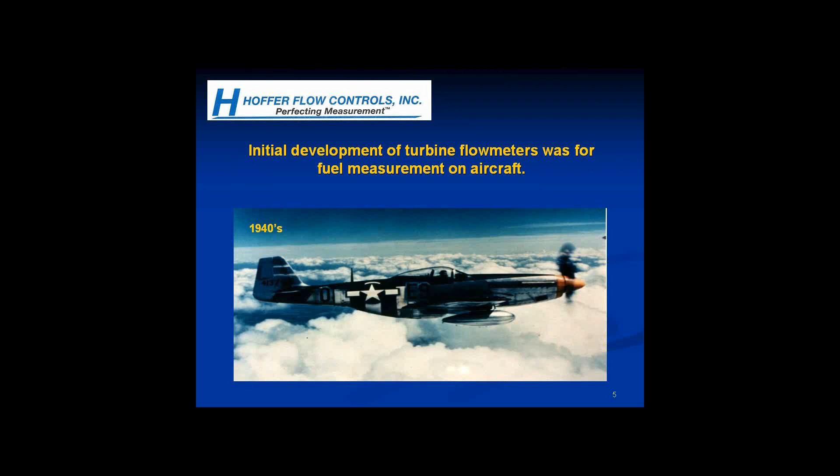The company of Hoffer has been around for a number of years, and some of the applications we've developed over the years continue to be flight-qualified liquid turbine flow meters for, as you see here, the stealth bomber.

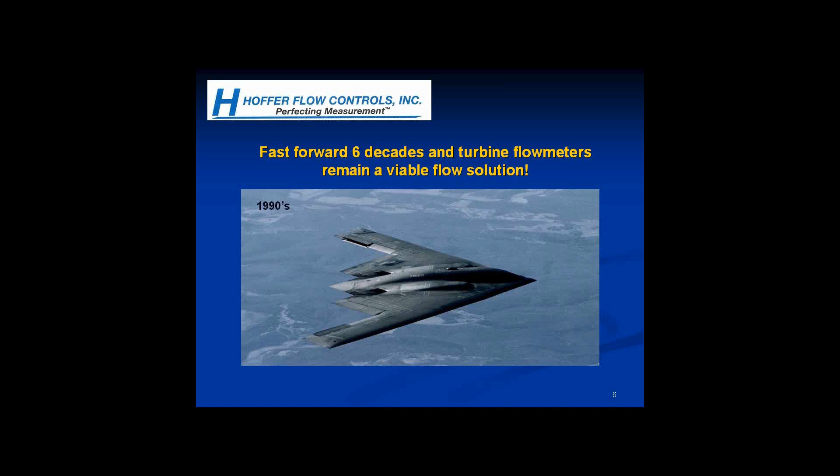Hoffer Flow Controls is a privately held company. We are located in North Carolina along the Eastern Shore, and we have a reputation in the industry for providing very high quality, high performance turbine flow meters.

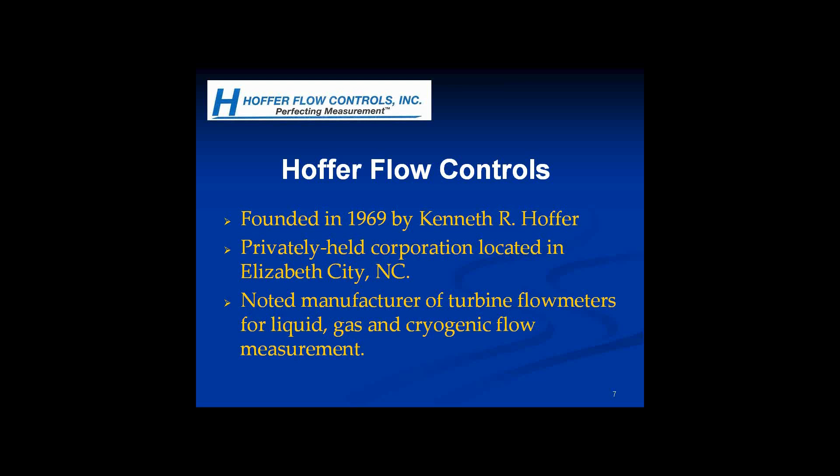Liquid cryogenics: primarily our meters can be found on bulk delivery trucks of liquid oxygen, argon, nitrogen, and liquid CO2. Our meter is essentially the cash register on those cryogenic bulk delivery trucks. Other markets include pharmaceutical and biotech. We do quite a lot in military, water and wastewater, aerospace, automotive manufacturing.

Our meters, interestingly enough, are mounted on a number of NASCAR automobiles and also on drag cars for monitoring the fuel usage and the fuel consumption on those race cars. And for the power industry, our meters are typically used to control the NOx emissions, or on the fuel measurement side in power generation.

Our company has a history for being able to design and build custom flow meters in a relatively short period of time. Some examples of our custom design meters include high pressure units. We've designed and supplied high pressure turbine meters that are rated up to 60,000 PSIG. And we've worked with all types of exotic alloys and

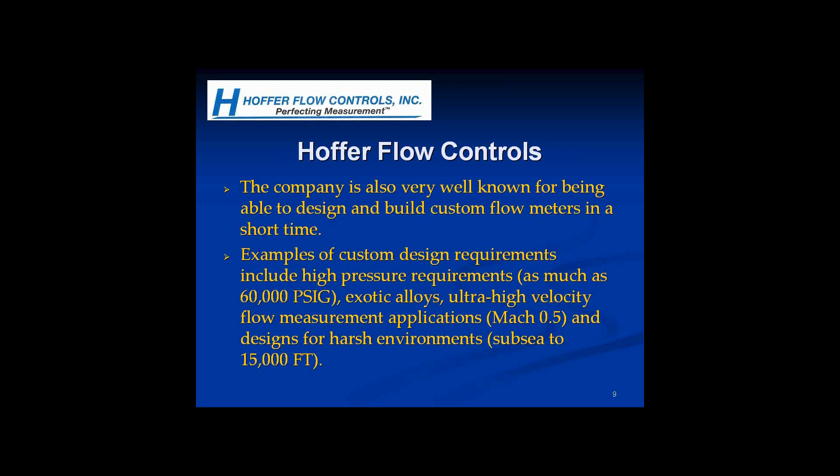A basic review of the technology itself: a turbine meter is measuring velocity of the moving fluid, and they're typically used in clean, low to mid viscosity applications. We typically cap our meters at about 100 centistokes. Any applications that are more viscous than that tend to become extremely nonlinear and non-repeatable.

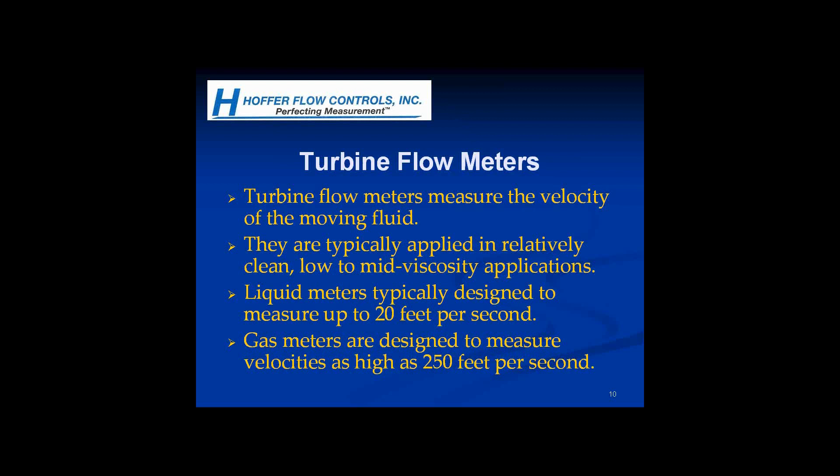We have a through shaft that supports the flow meter internals. You'll see a lock nut at the end of that through shaft on the inlet and then on the outlet side of the meter. We have a rotor assembly mounted directly under a pickup coil. So as the fluid or gas moves through the turbine flow meter, the rotor assembly rotates and the pickup coil produces pulses. You can relate the frequency of the pulses to flow rate, and you can relate the number of pulses to flow total.

With turbine meters, you're typically talking about some basic definitions in performance. Linearity is a measure of the accuracy of the device relative to the K-factor. So it's the percentage of deviation from the average K-factor. The K-factor is the number of pulses that the turbine flow meter produces per engineering unit. So, for example, a 1.5-inch turbine flow meter typically produces 230 pulses per gallon.

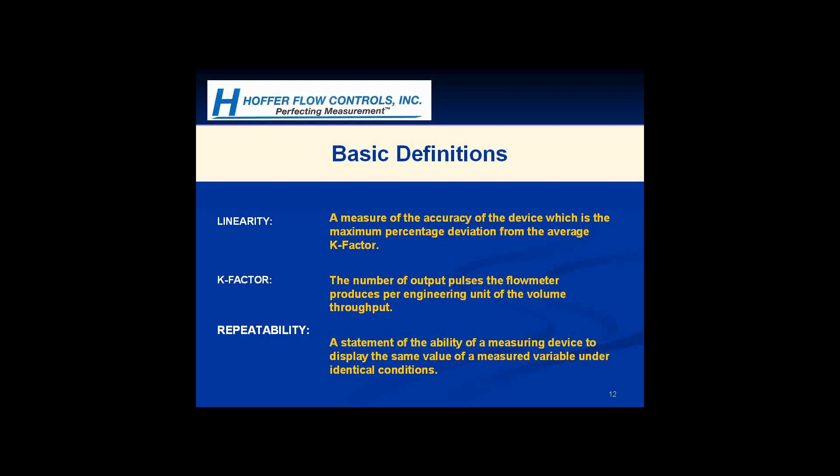So typically this would represent a K-factor over a 15-to-1 to a 20-to-1 turndown ratio between maximum flow and minimum flow. And some other variables and performance characteristics that we're looking at relative to flow rate: your pressure drop through the flow meter increases as your flow rate increases, your frequency output coming off of the pickup coil increases relative to flow rate, and the amplitude of your signal increases with flow rate as well.

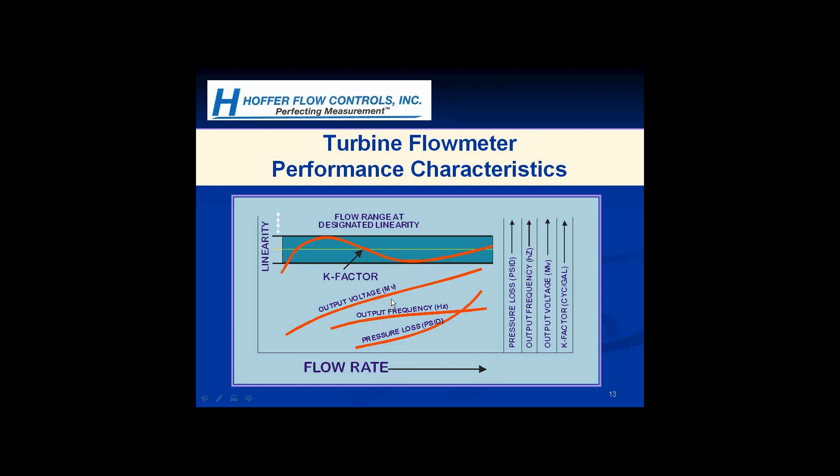Why use turbine meters when there are so many other choices, and how does a user go about selecting the best flow meter for his or her particular application?

Well, one of the things that Hoffer really specializes in, and our forte, is in the supply of application-specific flow meters for a particular application. We do not typically approach a flow application with a standard product line and try to make the standard product fit within the scope of that application. We take the specifics of the application, and then we try to design and supply a flow meter pertinent and appropriate for that particular application.

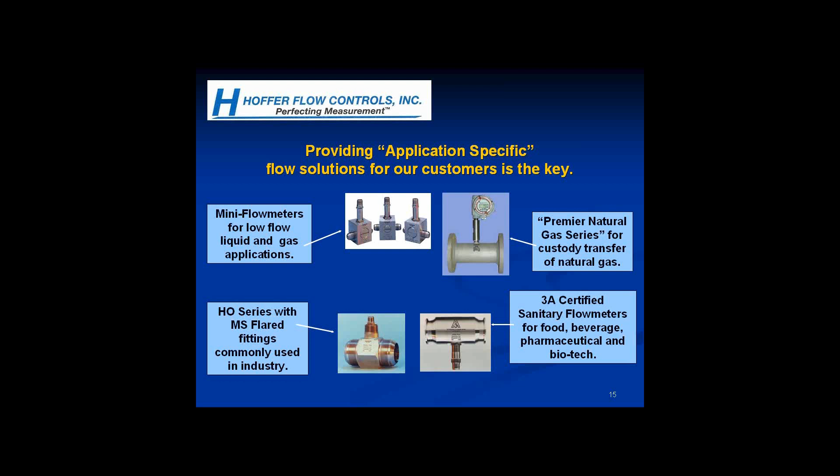Let's talk specifically about some of the advantages of turbine meters over some of the other technologies that are available to users today. And one area where turbine meters are considered to be perhaps a better choice than other technologies is in terms of performance. They're extremely accurate, and they're commonly used because of this accuracy and this linearity. They're typically used for custody transfer on pipelines and custody transfer as other goods and liquids pass from one supplier to a customer. So oftentimes turbine flow meter systems are used basically as the cash register in lots of custody transfer applications. So performance is an advantage.

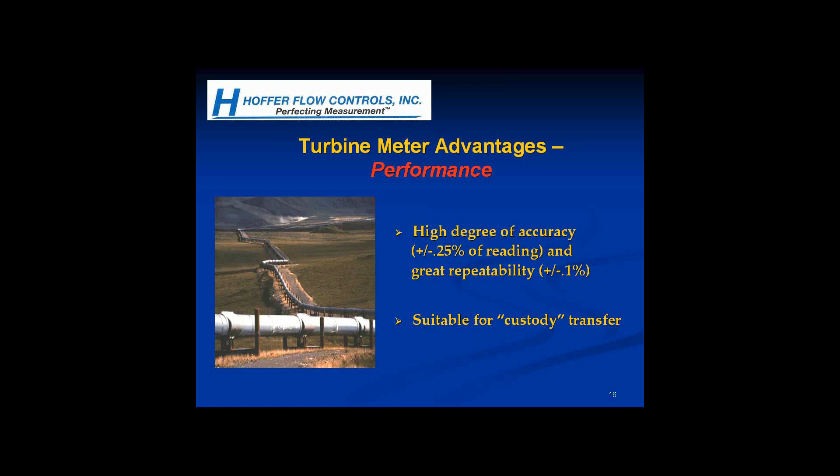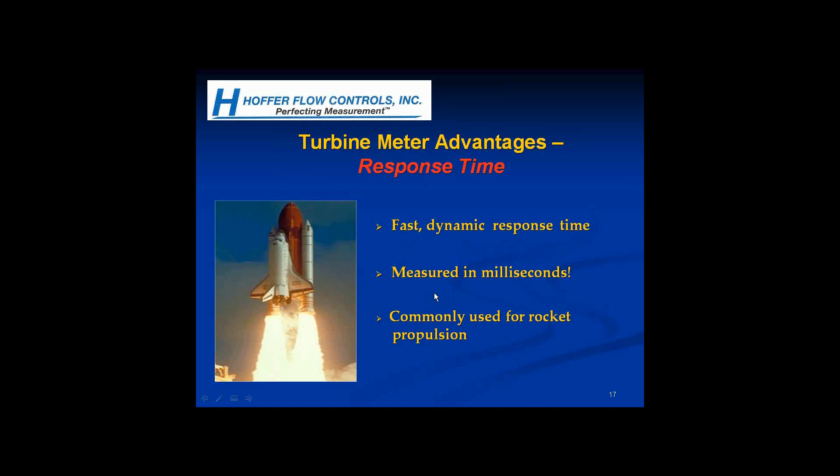Another area where turbine meters really shine is they respond very quickly to changes in flow conditions. So the response time is very important on turbine meters. And the reason they respond so dynamically is in the case of the Hoffer turbine, we precision machine all of our rotors. They're all machined, they're not cast. So they're relatively light, and because of that fact, they respond very dynamically to changes in flow rates. Those changes can be measured in milliseconds, and turbine meters are commonly used by NASA for rocket propulsion.

Another advantage of turbine meters as a class of measurement devices, they can be designed to tolerate and work reliably in applications where there's a lot of shock, vibration, and temperature extremes. And an example of that would be in cryogenics again. As I mentioned earlier, our company supplies turbine flow meters and totalizers to the cryogenic market for use on their bulk delivery trucks. When we pioneered the use of turbine meters back in the 1970s, prior to that time, most of the cryogenic companies were billing customers as a function of the weigh scale. They'd load product onto the truck, make a delivery, go to a scale, and figure out the difference in weight and bill based on that function.

Today, actually all cryogenic trucks in North America and most throughout the world are outfitted with flow measurement systems, and in many, many cases, those are Hoffer flow measurement systems. They are designed to tolerate the over-the-road shock and vibration conditions that will obviously be seen by the truck as it makes its delivery in all kinds of weather conditions, from very warm temperatures to very cold temperatures. The cryogenic liquids themselves are very, very cold liquids, so our meters had to be designed and are designed to tolerate working temperatures as low as minus 450 degrees Fahrenheit. And as I mentioned earlier, our systems are basically the cash register on many of the bulk delivery trucks.

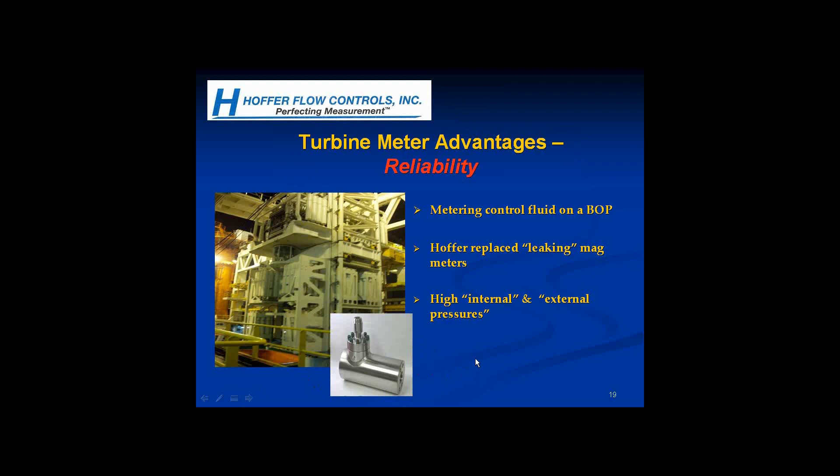But reliability would be an advantage of a turbine meter, perhaps over another type of meter technology. The meters are designed and can be designed and supplied to be extremely robust. Hoffer has supplied turbine flow meters to the U.S. Navy for every class of U.S. Navy vessel that is in our fleet.

We have flow meters that are used to supply the fuel to the engines, and we have flow systems that are on ships for missile cooling applications. We've supplied flow meters for the reverse osmosis water purification plants on ships. So they can be built, obviously, for applications that are, again, in a harsh environment and that are subject to shock and vibration.

And what we did to make the flow meters more robust and capable of meeting military standards for high shock and high vibration is we altered the design on the internals of the flow meter. You may recall that cutaway shot earlier where I showed two bearings and a through shaft and the rotor assembly. Well, the Navy design meter is similar, but it is different in that it is a design that is more robust, and it is also a design that has been tested to meet military standards for shock and vibration.

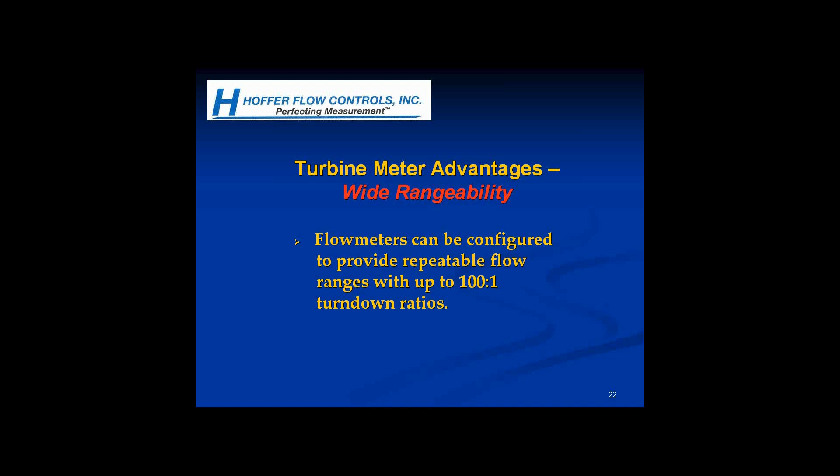Another advantage of turbine meters is wide rangeability between your minimum and your maximum flow rates. We are capable of obtaining flow turn-down ratios of up to 100 to 1 for our flow meters, and that's very impressive because that's a repeatable flow range. And I'll show you an example of that.

A modulated carrier pickup coil is offered, and the benefit of this particular coil is it eliminates the magnetic drag characteristic that you see at the low end of the flow curve. Remember when we looked at that slide earlier and we saw how the linearity dropped off at the lower flow rates? There are a couple of reasons the K factor and the linearity drop at the low end of the flow scale, but one of the reasons is the drag characteristic from the mag pickup. So if you eliminate that drag characteristic by going with a modulated carrier pickup coil, you'll see something very interesting.

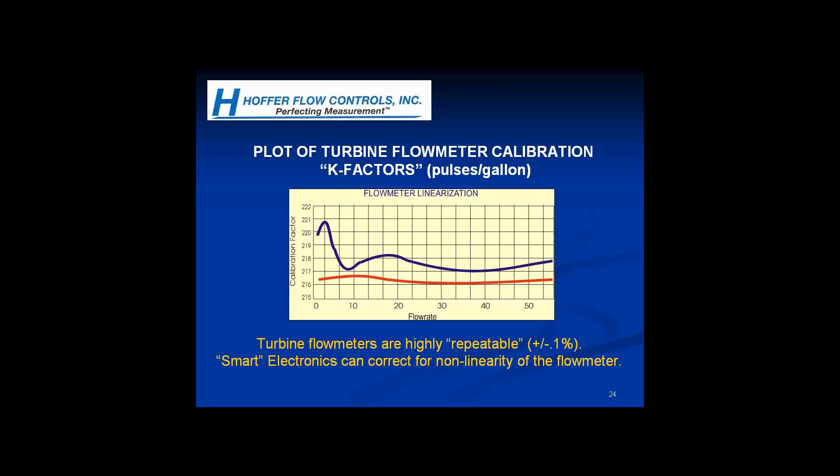Another advantage of turbine meters: they're typically spec'd out in terms of linearity as a percentage of reading, versus other types of flow measurement devices that are spec'd out as a percentage of full scale. As an example, a meter at a flow rate of 100 gallons per minute that's plus or minus 0.5% translates to 0.5 gallons. That's accurate at 100 GPM, but if you're operating over a 10-to-1 ratio and down around 10 gallons per minute, that same half gallon represents 5% of your measurement uncertainty. So there's a big difference between devices when you start talking about specmanship, full scale versus percent of reading.

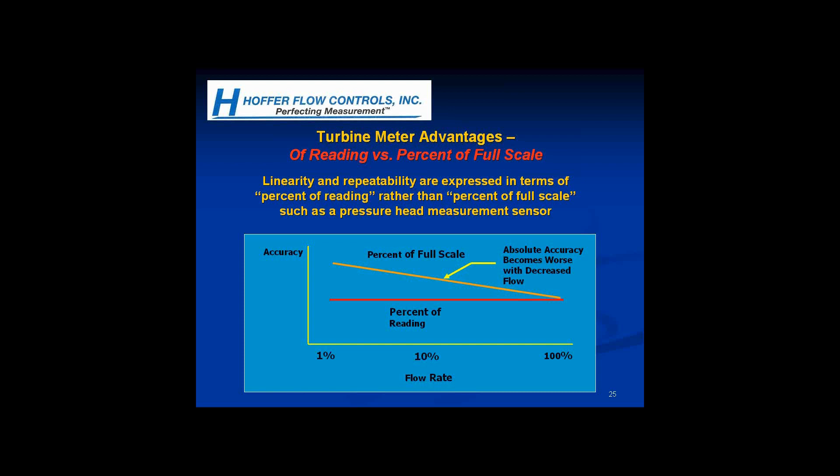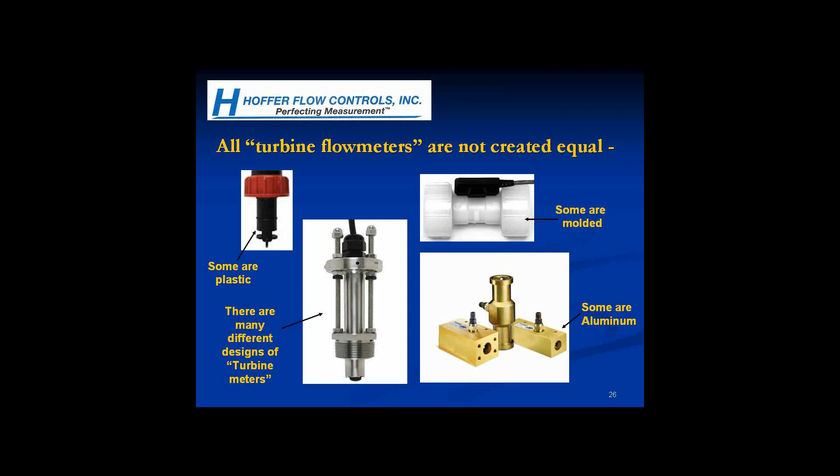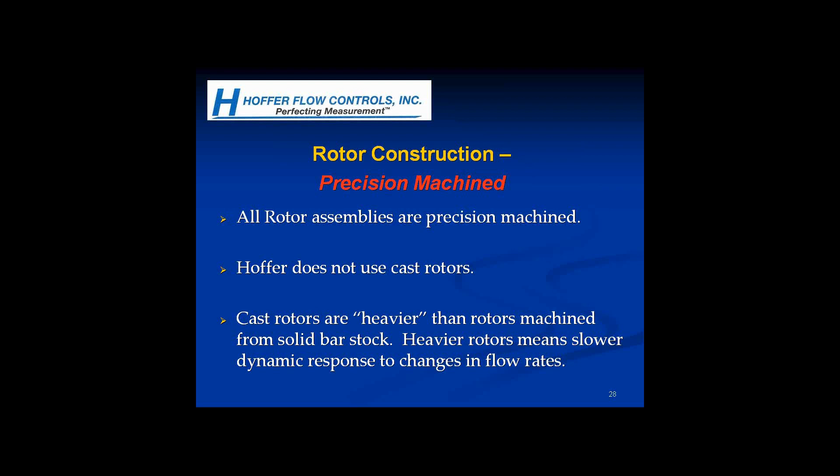Common design elements for a high-performance turbine flow meter, such as the Hoffer product line, include precision machined components. The rotor assemblies are all precision machined—we don't use any cast components, including the rotor assemblies. Cast rotors are heavier than precision machined rotors, and heavier rotors mean slower dynamic response to changes in flow rates.

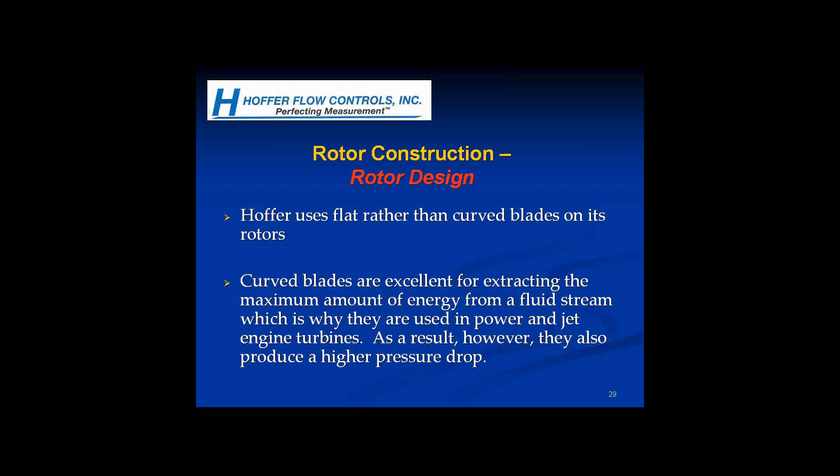Let's talk about the design of the rotor assembly itself. The Hoffer meter, as you saw on those cutaway shots and on the Navy meters, utilizes a flat blade design on the rotor assembly, as opposed to some other manufacturers that offer curved blades. Curved blades are excellent for extracting energy, which is why you see them used on jet engines and things like that, but the trade-off is they have a significantly higher pressure drop than a flat blade. So our rotor assembly design gives lower pressure drop.

Our rotors can be customized for a particular application by making the blades heavier, and we commonly do this in our line of oil patch meters, where we're actually metering slurries at low pressures. So if we know a customer may have suspended particulate in their process liquid, we can customize the rotor assembly—we can make the blades shorter to allow for clearance of the particulate, so we must know the maximum particle size, and we can make the blades thicker.

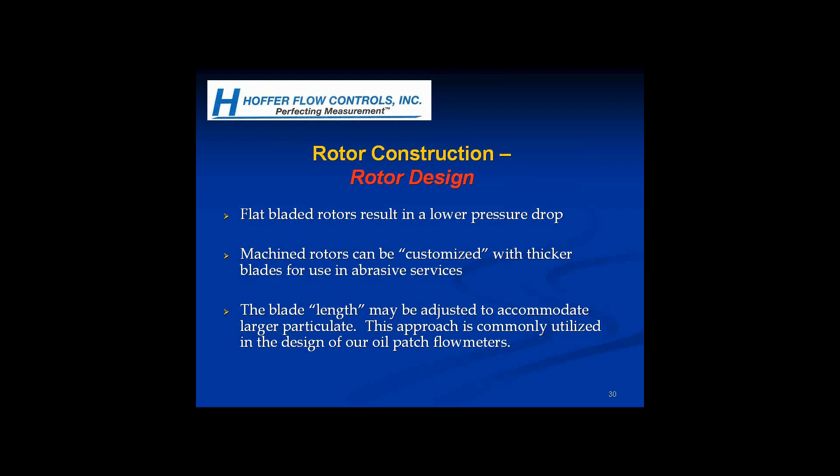Because our rotor assemblies are precision machined, we can customize them and make them available in multiple blade angles relative to the hub of the rotor. For example, on our gas flow meters, we offer 4 different rotor assemblies: a 15, a 20, a 25, and a 30-degree rotor. Each various blade angle rotor provides a different flow range, so within the scope of our gas meter product line, we can tweak that to be most appropriate for that particular gas flow application.

The steeper the blade angle, the lower the flow rate capability of the meter. So if you have a customer with an application where the line size is larger relative to the lower flow rate, you can go with a steeper blade angle to basically obtain the lower end of the flow scale for that particular application.

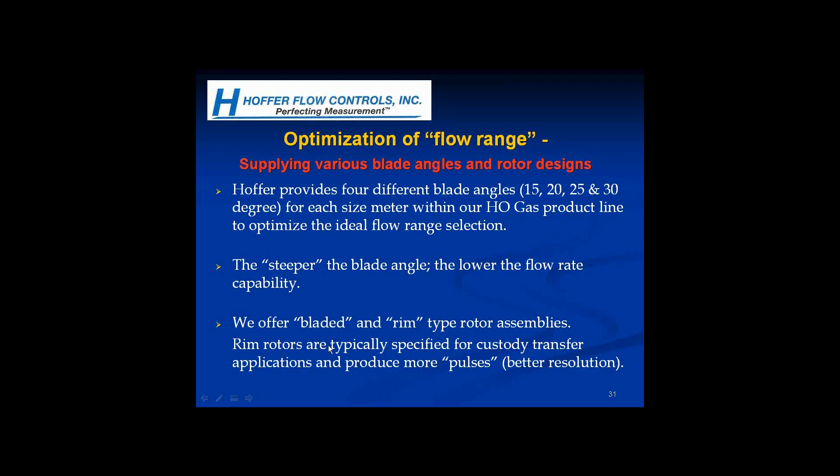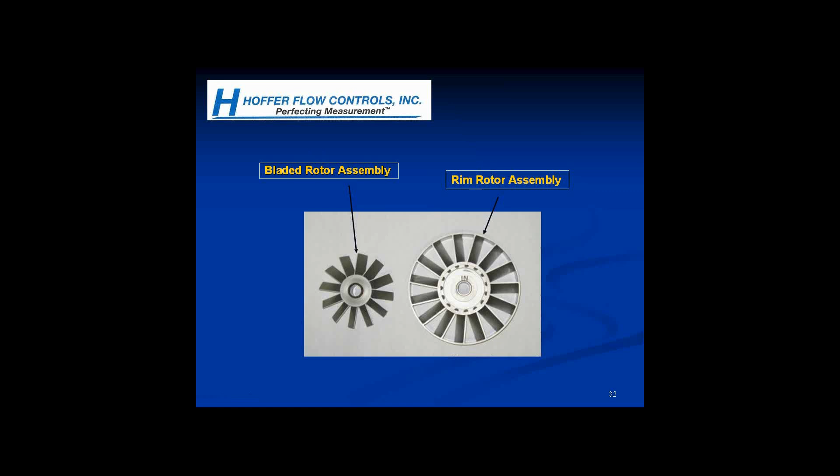In conclusion, some of the reasons we've discussed this morning that would be appropriate for selecting turbine meters over other available technologies would be if accuracy is important, if you need a robust flow meter, if you require very dynamic responses because you have an application where you change flow rates regularly, if you require a wide turn-down flow range, or if you have a specific footprint or space in which the flow meter must fit. We commonly supply longer flow meter housings. The blowout preventer application was a case in point where we had to fit a specific footprint for that particular application. And if you want a flow meter that is light in weight and easy to install, turbine meters should be considered as a possible solution for you.

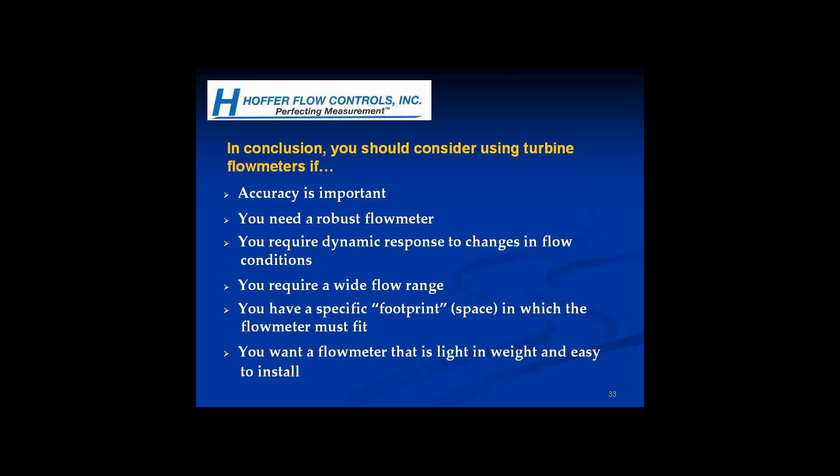And that's all I have for you this morning. Thank you for your time.

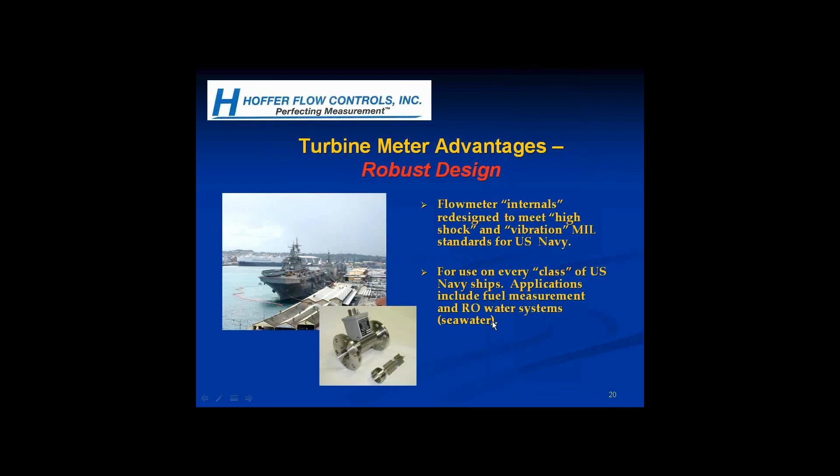This is Pat Gorman. I have a question. One of the slides showed the design of having thicker blades for fluids that would contain some particulate matter. Right. I was under the understanding that turbine flow meters are best applied for clear or clean liquids.

They are. The applications that Hoffer gets involved with where there are slurry applications are primarily oil patch applications, where after they've fractured the well, they pump at very high pressures slurries into the well to keep the fractures suspended and to support the fractures from collapsing. So they use a variety of different slurries for that application—some are cement slurries, some are sand slurries, some are proprietary slurries. But what we do for those oil patch applications is we shorten the blades on the rotor and we make the blades heavier. And those customers actually will run a low-pressure Victaulic fitting flow meter until they lose the signal.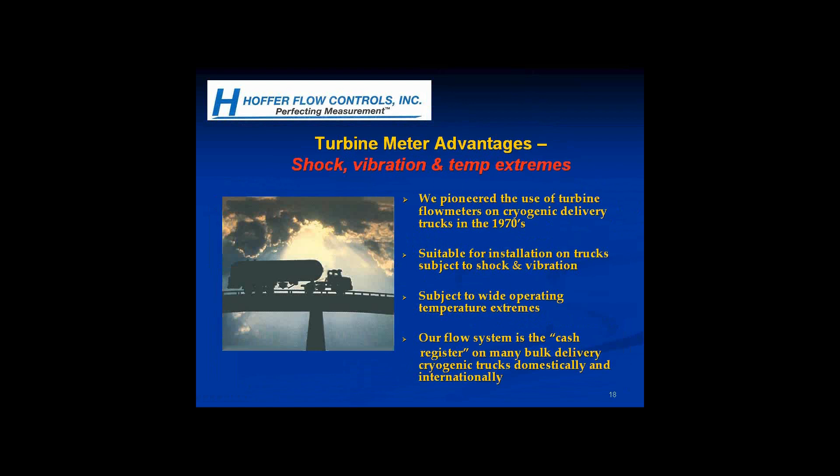Thank you. Welcome. Hi, this is Sanchita from Merichem. I had a question about the use of turbine flow meters for gas application. Yes. What about the pressure and temperature compensation? Is it needed for these meters?

Yeah, well, it depends. There are two different ways of approaching a gas flow application. We have some users who simply purchase our meters with a totalizer rate indicator, and they read out in volume, or they read out in actual cubic feet. But we have many users who are doing custody transfer of natural gas, for example, in the power industry, and all of those systems are supplied with turbine flow meters that have been calibrated at the user's operating density.

So the K factor is supplied for the specific density that the users are operating at. And then we have a flow computer that is AGA 7 compliant, so it does the mass flow calculations with a temperature input, a pressure input, and the volumetric flow meter input. It then calculates mass flow according to the AGA 7 requirement, and our computer also will correct for supercompressibility, or AGA 8. So we have many systems that are mass flow for gas, and we've supplied many that are volumetric. It really depends on the application and what the user wants.

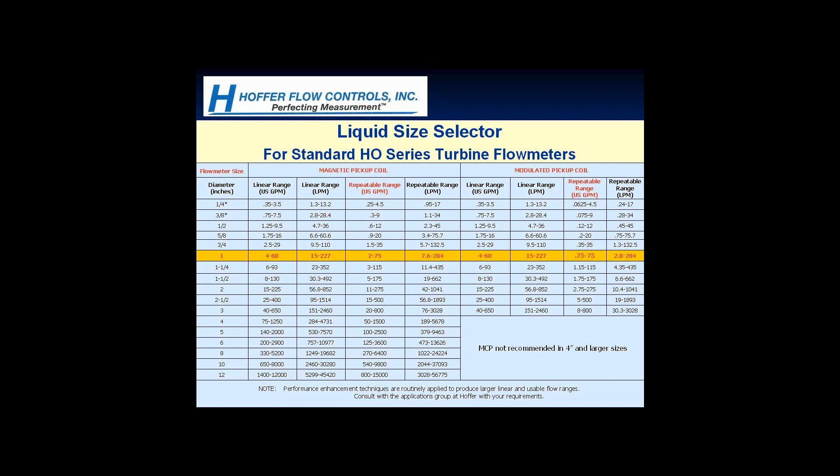Yes, this is Alex Crawford from Thomas Engineering. I do have a question on the pharmaceutical application. Are there flow meters available that are truly designed to BPE standards rather than 3A?

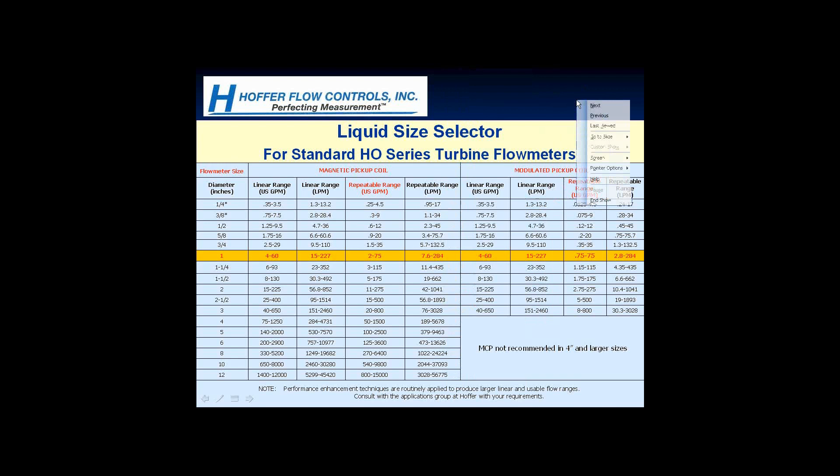I am going here to an application note on our website, pharmaceutical. I know we've supplied a lot of our 3A meters to the pharmaceutical industry for ultra-pure deionized or water for injection, and some of our users have used the flow meter with 316 with a very fine or highly polished finish.

Right, and we have other users who really don't want any stainless in the line. So for those users, we offer a line of Teflon flow meters so that stainless doesn't come in contact with the purified water. What we do is we use a Teflon liner, and then we make all of the internals out of Teflon for some applications.